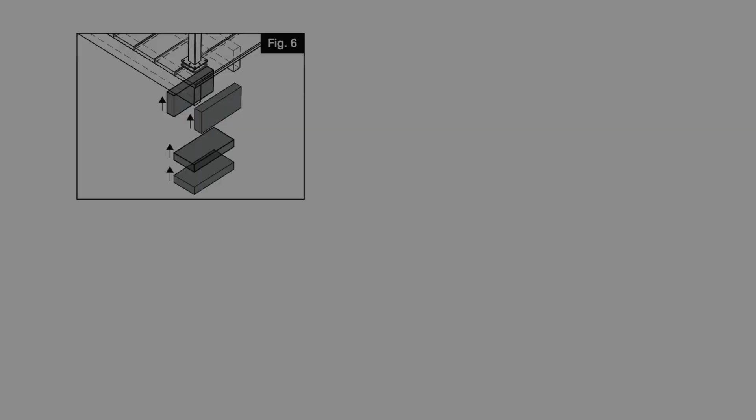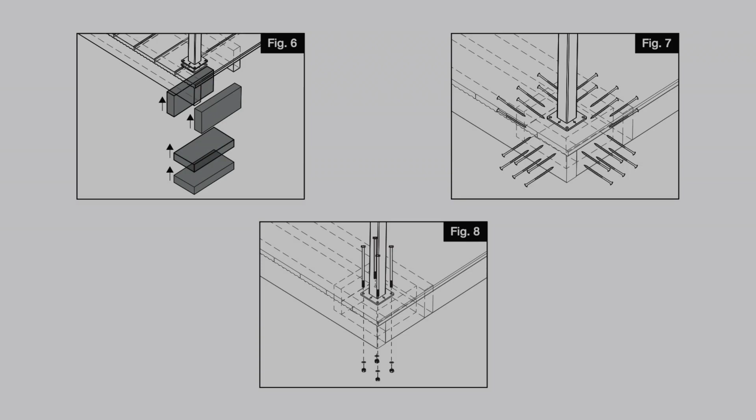Beneath all post locations, install at least two 2-inch by 8-inch blocks, using at least 3 number 10 by 3.5-inch deck screws, penetrating through the joists at least 1.5 inches into the blocks. Screws are sold separately.

Plumb and level the posts using leveling shims. Secure the posts in place with the appropriate fasteners, also sold separately.

Remove the stair cable guide assembly from packaging and lay it on the ground near the post it will be inserted in. Unspool each loop of cable fully so they are free of kinks, allowing the cables to lay flat and straight on the ground.

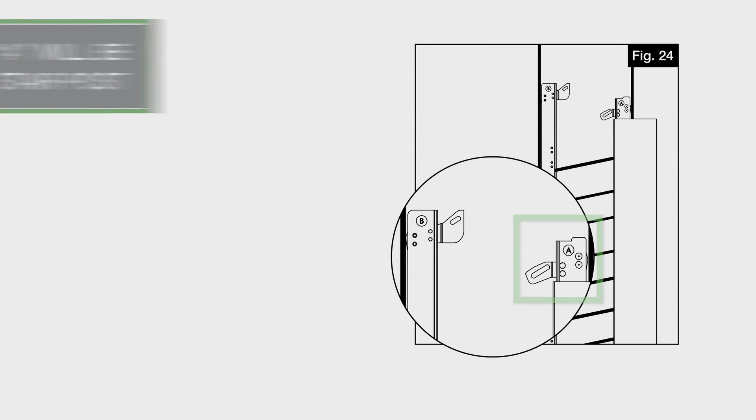Identify stair cable guide A. This guide will be inserted first in the top stair post. Slide cable guide A assembly into the post.

The bracket should be at the top and oriented downwards, and the bottom of the guide should bottom out on the post base. The cable will slide down the post through the open slot in the side of the post. Make sure the excess cable exits out of the top of the post.

Guide B, to be used on the bottom post, has a hole near the bottom. This is used in an upcoming step.

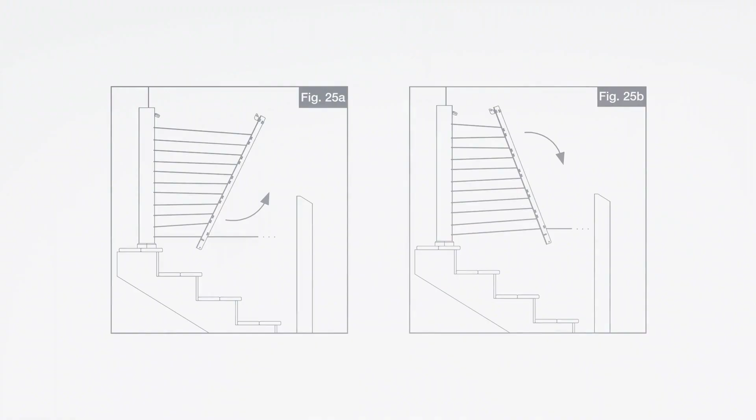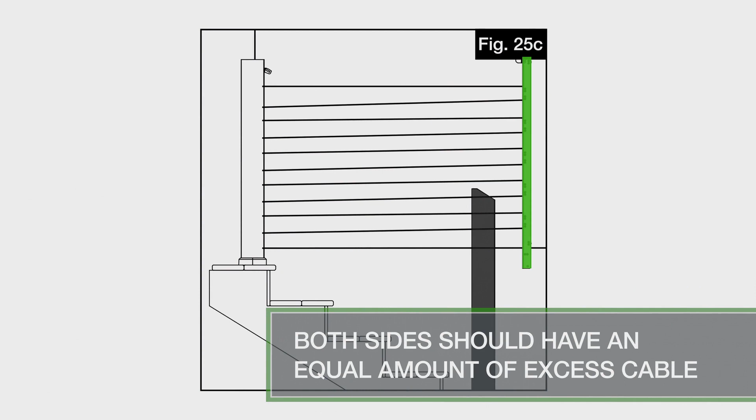While holding cable guide B, use a back and forth motion to stretch the cable and work guide B towards your lower post. Do this until the guide is past the lower post. Ensure an equal amount of excess cable remains on both guides.

Be careful not to pull all the slack into one guide. If needed, you can redistribute the slack by loosening cables in the middle of the section and pulling excess in the direction needed. Insert cable guide B into the channel of the second post, ensuring that the excess cable feeds up and out of the top of the post.

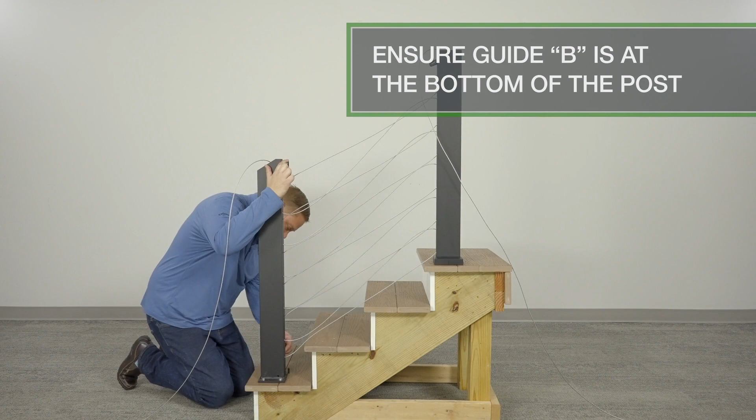Ensure guide B is at the bottom of the post and insert the bolt through the pre-drilled hole in the lower stair post. Thread and tighten the nut.

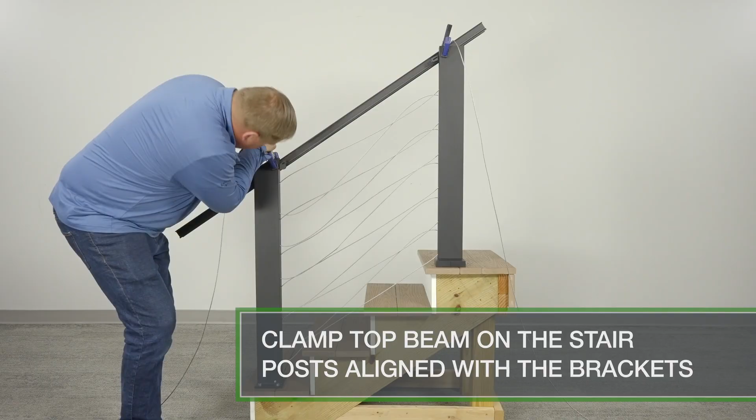Clamp the top beam on the side of the stair posts, aligning it with the brackets. Mark the beam at the posts.

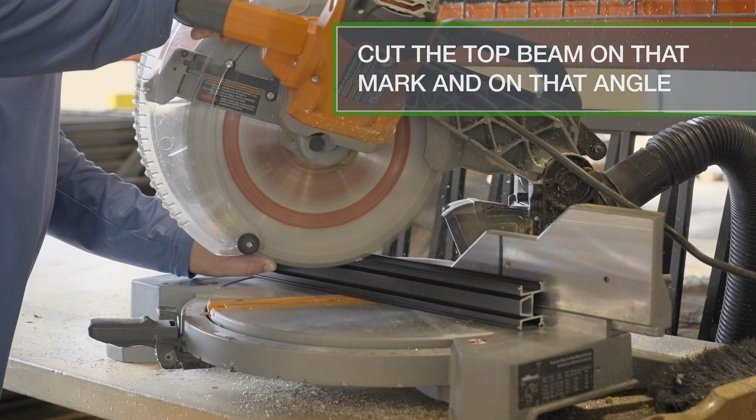Cut the top beam on that mark and on that angle. Please note, the top of the beam has the larger open channel. Be sure the beam is oriented the correct way before you clamp, mark, and cut.

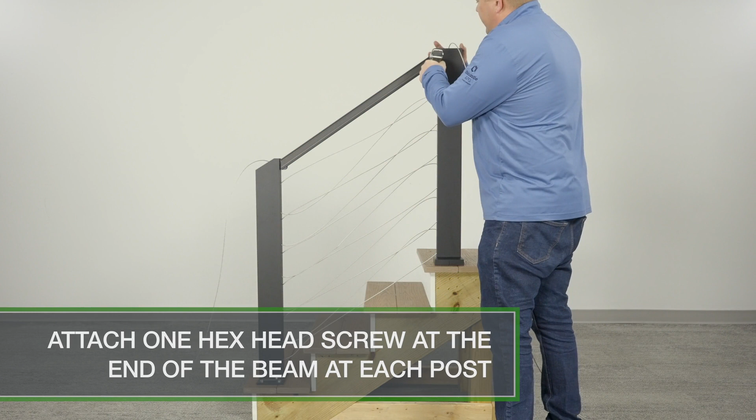Place the cut beam between posts and press onto brackets. Use provided hex head screws and attach one screw at the end of the beam at each post. Use the line etched into the beam as a guide for your screw. Screws should be on the line and approximately 1/2 inch from the end of the beam.

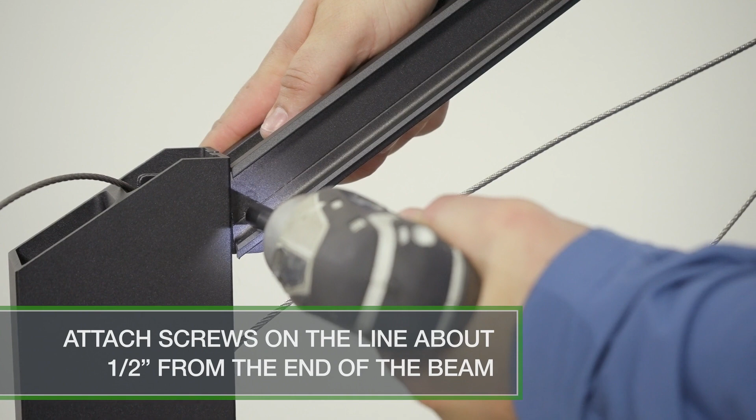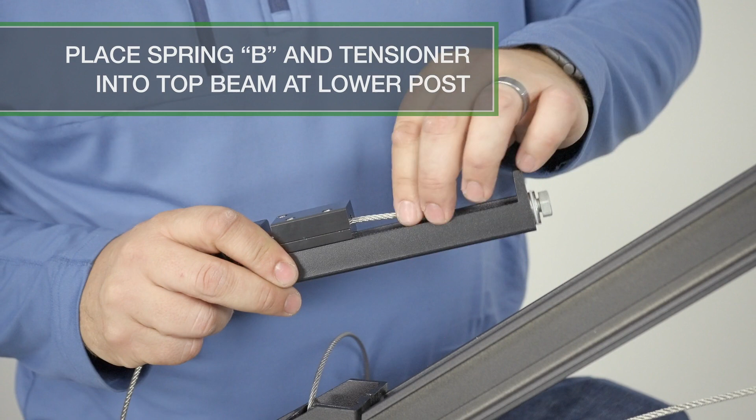Feed cable through tension spring B and tensioner. Place tension spring B and tensioner into the top beam at the lower post. Please note, these are separate pieces. Feed the cable through the block and spring first, then the tensioner.

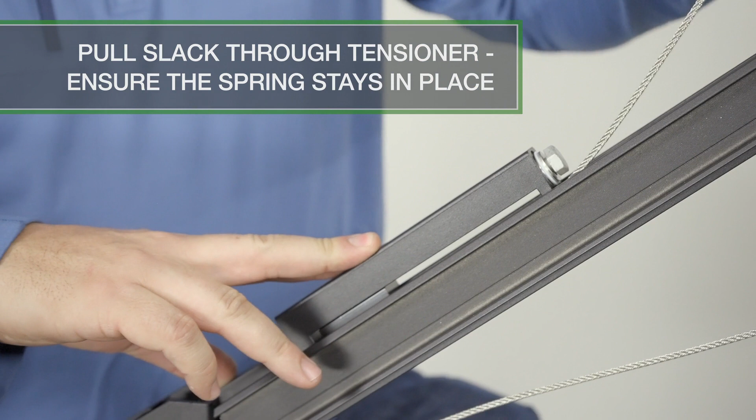Make sure the cable is rounding the last turn of the guide by looking down the post. Pull all slack through the tensioner. Also, ensure the tension spring stays in place in the beam at the post before pulling tight. Locate tension spring A and repeat this step at the top of the stairs.

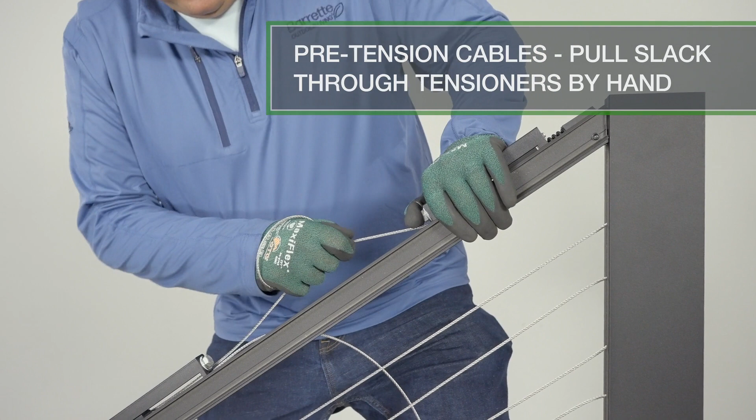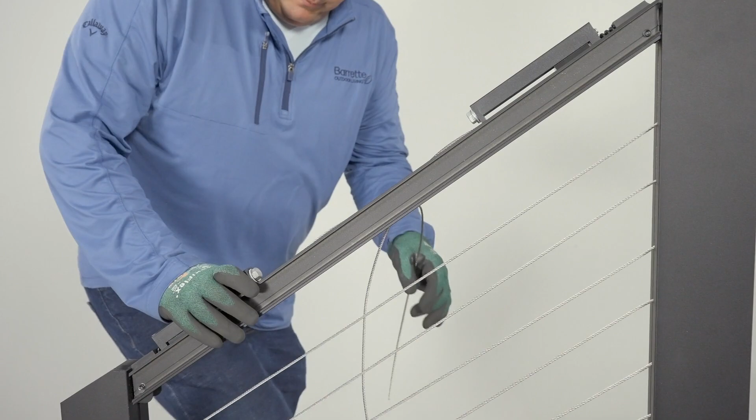Pre-tension cable on guide A and B by pulling as much slack through the locker by hand. This step is crucial to attain proper finished tension. Wearing a glove may help while pre-tensioning. Ensure the cable is centered in the cable guide while pulling tight.

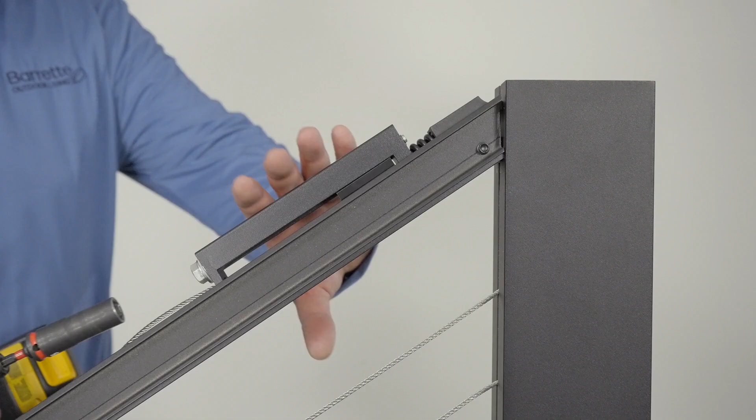Use an impact driver or power drill to tighten the tensioners. Use a 9/16 socket or wrench to tighten the bolt at the end of the tensioner. Do this for both tensioners at each post until the spring is no longer visible. Complete this step for all sections.

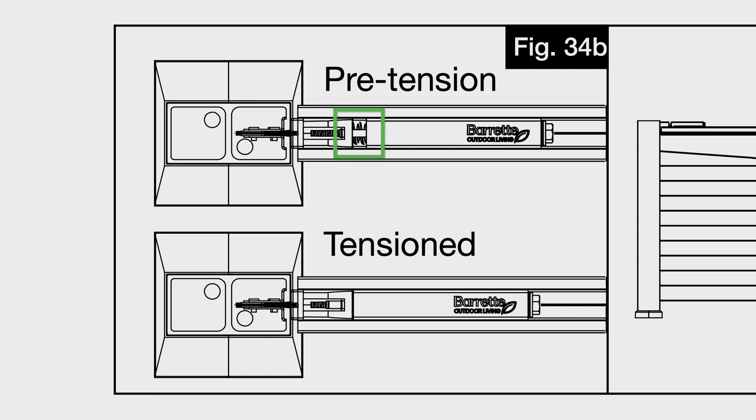Final tensioning: push down on the top row of cable firmly. The spring near cable guide A should be visible once again. Using your drill and 9/16 socket, tension the bolt until the spring is no longer visible. Complete the same procedure for cable guide B, but push on the bottom row of cable to loosen the spring.

Cut excess cable, leaving approximately 12 inches remaining from each guide. This excess will remain in the top beam channel.

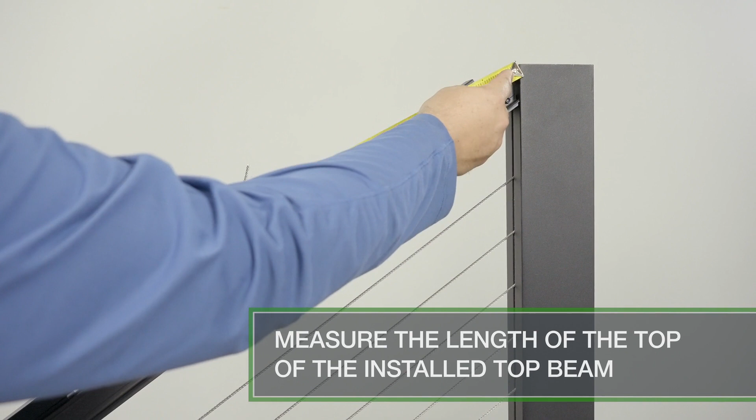Measure the length of the top of the installed top beam. Subtract 1 1/4 inch and cut the top rail to this dimension. Notice that this cut is straight, not at an angle.

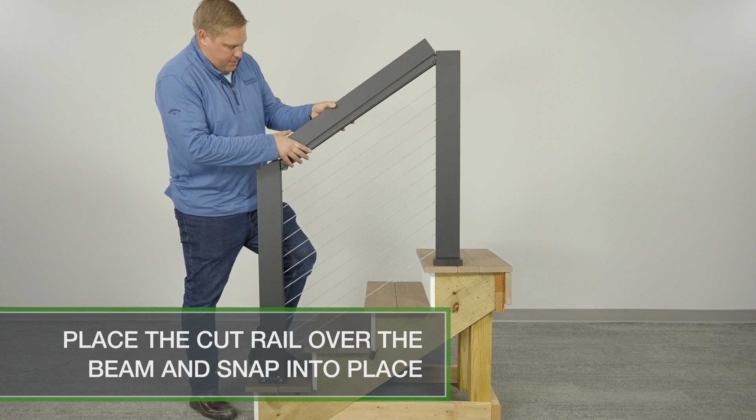Place the cut rail over the beam and snap into place using a rubber mallet if needed.

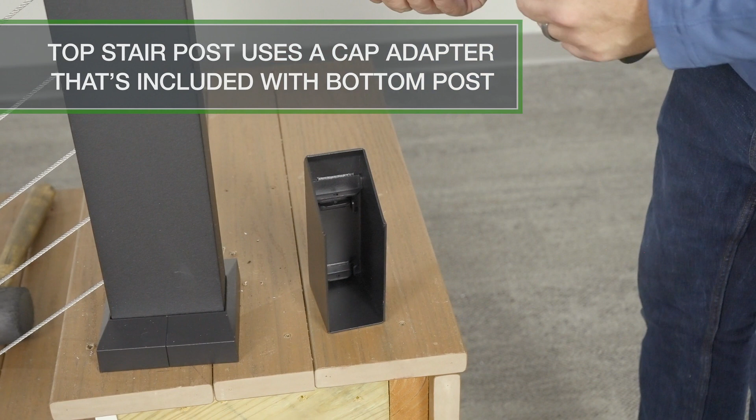The post at the top of your stairs will use the cap adapter that is included with your bottom stair post. Fasten it to the cap before pressing it into place.

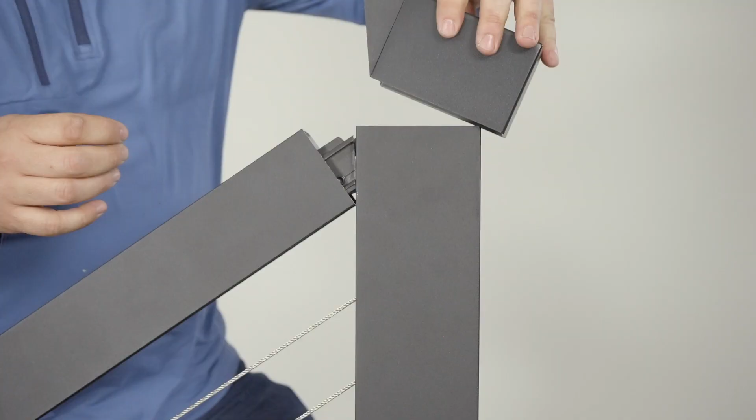Place the appropriate end, line, or corner post cap onto the top of each post and press or tap into place with a rubber mallet if needed.

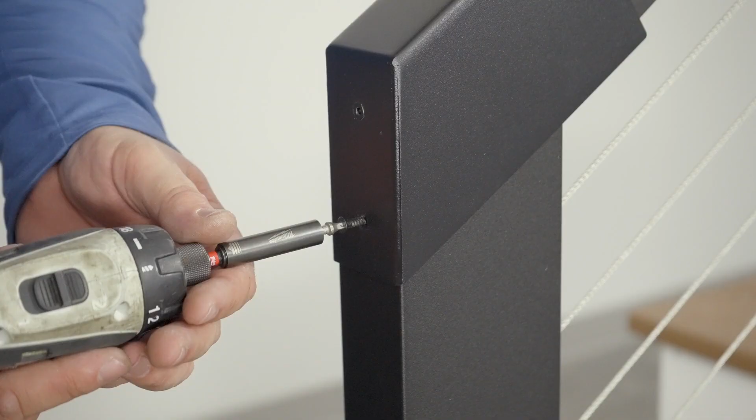The mid-stair and bottom stair post caps include 2 screws. Press the cap into place and attach to the post with these included screws. Install base trims on each post.